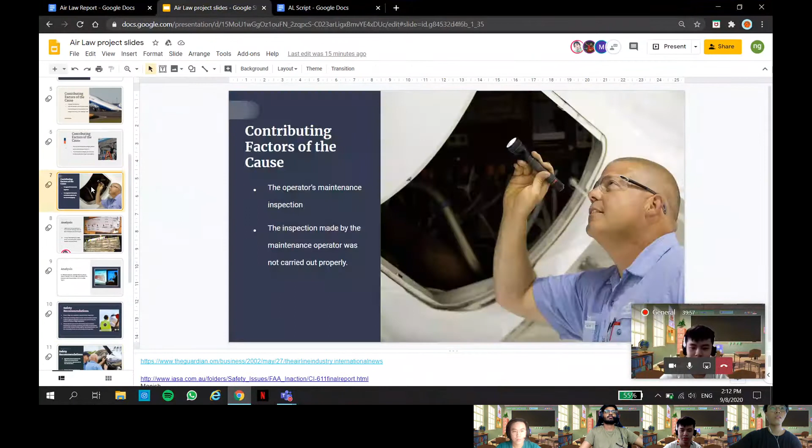Now, I will pass the time to Manish to cover the contributing factors of the cause. Okay, thank you, Jaden. So now I'll be sharing with you all the contributing factors that led to the crash of China Airlines Flight 611.

One of the main contributing factors that led to the crash of China Airlines Flight 611 was improper maintenance after a tail strike incident that occurred much earlier. On February 7, 1980, the aircraft was flying from Stockholm Arlanda Airport to Taoyuan International Airport via King Abdulaziz International Airport and Kai Tak International Airport as China Airlines Flight 009.

While landing in Hong Kong, part of the plane's tail scraped along the runway. The aircraft was later depressurized and ferried back to Taiwan on the same day. A temporary repair was done the day after. Permanent repair was conducted by a team from China Airlines from 23rd May through 26 May 1980. Thus, the tail strike was one of the contributing factors that led to the crash of Flight 611.

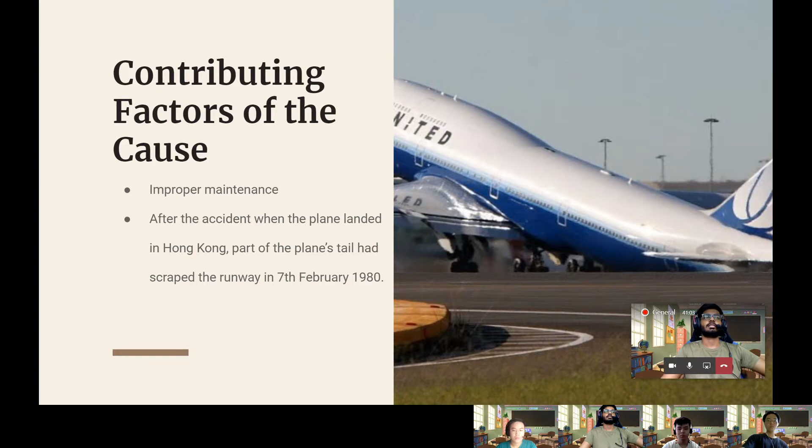Another contributing factor that led to the crash of Flight 611 was the way the maintenance company carried out the maintenance for the aircraft.

After the tail strike incident, the permanent repair was supposed to be carried out in accordance with the Boeing Structural Repair Manual, also known as SRM, by the maintenance company. According to the SRM, repairs can be made either by replacing the entire affected skin or by cutting out the damaged portion and installing a reinforcing doubler plate to restore structural strength.

However, the maintenance company from China Airlines did not follow the SRM. Instead, the China Airlines maintenance team carried out the maintenance even though the damage inflicted on the tail was way beyond what a doubler is meant to fix.

The crash would not have occurred if the doubler was installed properly, as the damaged skin was not trimmed properly and the repair doubler did not extend sufficiently beyond the entire damaged area to restore structural strength. This means that all the scratches would have been completely contained by the innermost row of fasteners, and the fasteners themselves would have been strong enough to stop the propagation of any new and existing fatigue cracks.

However, as the installed doubler was too small, it failed to completely and effectively cover the damaged area where scratches were found, and outside, the outermost row of fasteners were meant to secure the doubler. However, the installed doubler, with scratches outside the rivets, provided no protection against the propagation of any concealed cracks in the area between the perimeter and the row of rivets.

After the number of pressurization and depressurization cycles during flight, cracks began to form around the exposed scratches. After 22 years, on 25th May 2002, after the faulty repair was made upon the damaged tail, the hull of the aircraft broke open mid-flight.

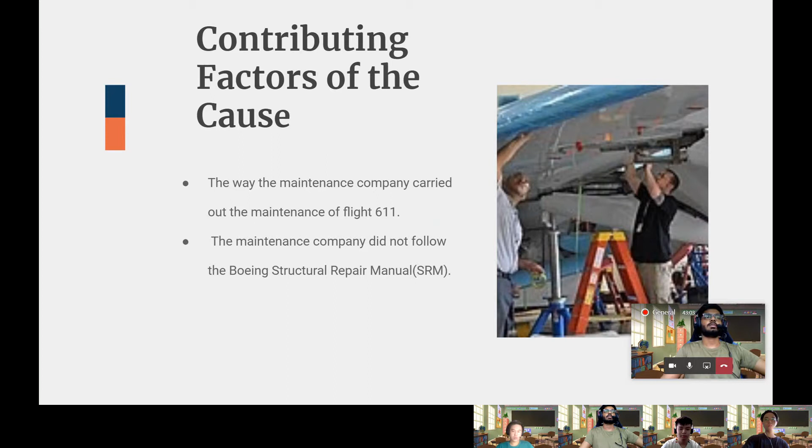Explosive decompression occurred once a crack opened up, causing separation of the aircraft fuselage aft section 46. The remainder of the aircraft section 46 went into abrupt descent, resulting in the separation of all four engines from the wings. This initial breakup point remained connected until the impact with the sea. Thus, this was another contributing factor that led to the crash of China Airlines Flight 611.

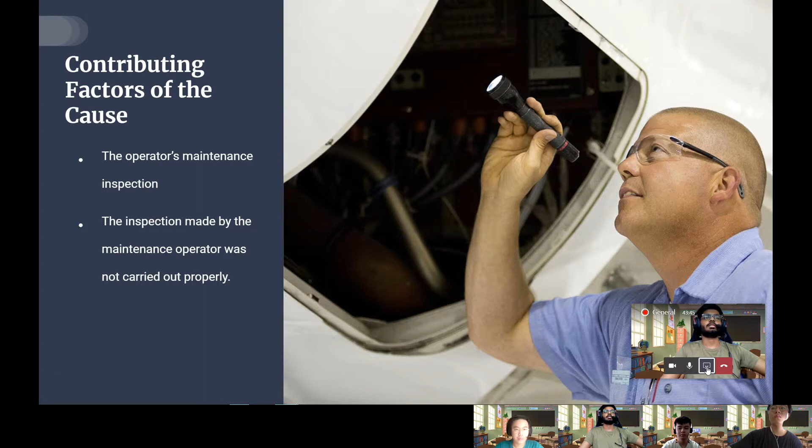Based on the recordings of the cockpit voice recorder (CVR) and the flight data recorder (FDR), radar data, the dado panel open-close positions, the wreckage distribution, and the wreckage examinations, the ASC concluded that the in-flight breakup of the aircraft as it approached its cruising altitude was highly likely due to the structural failure of the aft lower lobe section of the fuselage.

The ASC found evidence of fatigue damage in the lower aft fuselage centered about STA 2100 between stringers S48L and S49L, under the repair doubler near its edge and outside the outer row of securing rivets. Multiple site damage (MSD), including a 15.1-inch through-thickness main fatigue crack and some small fatigue cracks, were confirmed.

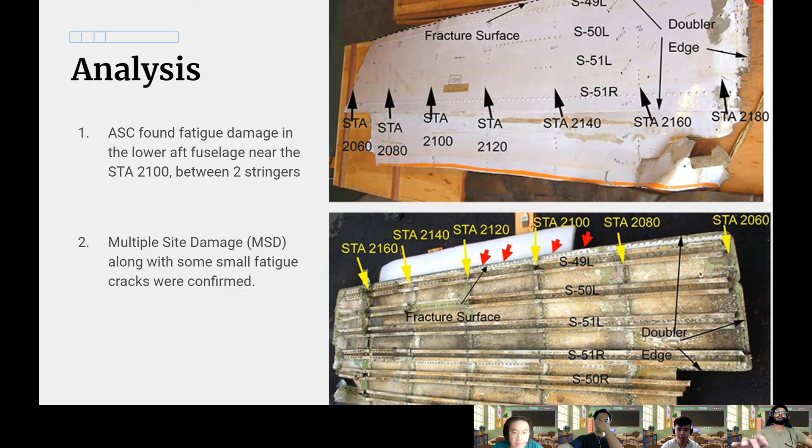Residual strength analysis indicated that the main fatigue crack in combination with the MSD were of sufficient magnitude and distribution to facilitate the local linking of the fatigue cracks, so as to produce a continuous crack within a 2-bay region about 40 inches. Analysis further indicated that during the application of normal operation loads, the residual strength of the fuselage would be compromised with a continuous crack of 58 inches or longer.

Although the ASC could not determine the length of cracking prior to the accident flight, the Council believes that the extent of hoop-wise fretting marks found on the doubler, and the regularly spaced marks and deformed cladding found on the fracture surface, suggested that a continuous crack of 71 inches in length, which is a crack length considered long enough to cause a structural separation in the fuselage, was present before the in-flight breakup of the aircraft.

The ASC found that the 15.1-inch crack and most of the MSD cracks initiated from the scratching damage associated with the 1980 tail strike incident in Hong Kong, for which the repair was not accomplished in accordance with the Boeing SRM, as the damaged skin in that area was not removed but trimmed, and the repair doubler did not extend sufficiently beyond the entire damaged area to restore the structural strength.

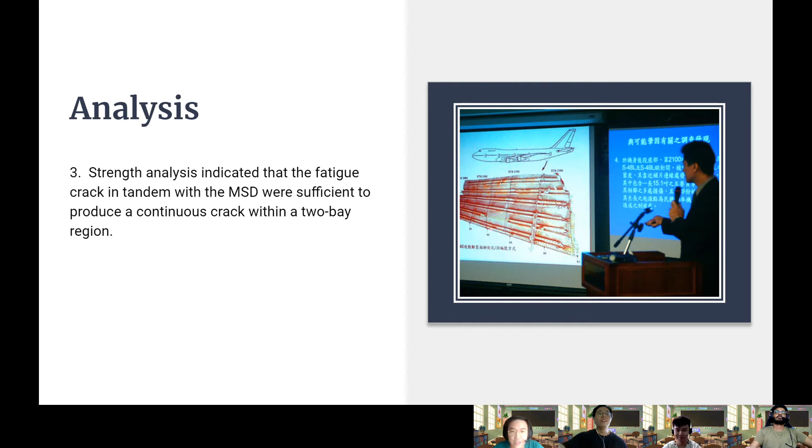Firstly, the CAL did not accurately record some of the early maintenance activities before the accident, and the maintenance records were either incomplete or not found. Before the first structural inspection in the 1998 MDV, the bilge area was not clean. For safety purposes, the bilge area should be cleaned before inspection to ensure a closer examination of the area.

Secondly, ensure that all safety-related service documentation relevant to Republic of China (ROC) registered aircraft is received and assessed by the carriers for safety of flight implications.

Thirdly, ensure that the process for determining implementation thresholds for mandatory continuing airworthiness information, such as the Repair Assessment Program (RAP), includes safety aspects, operational factors, and the uncertainty factors in workmanship and inspection.

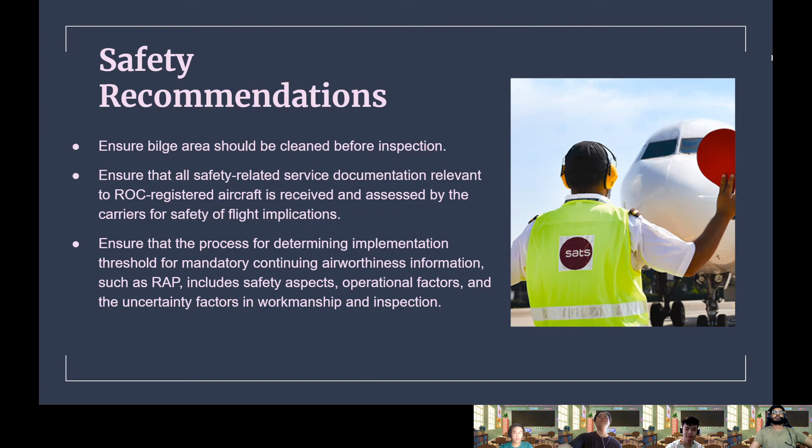Next, we should encourage operators to assess and implement safety-related airworthiness requirements at the earliest practicable time. Furthermore, we should closely monitor international technology development regarding more effective, non-destructive inspection devices and procedures.

The Aviation Safety Council (ASC) also recommends that the Boeing company should reassess the relationship of Boeing's field service representatives with the operators, such that a more proactive and problem-solving consultation effort to the operators can be achieved, especially in the area of maintenance operations, to develop and/or enhance research efforts for more effective non-destructive inspection devices and procedures.

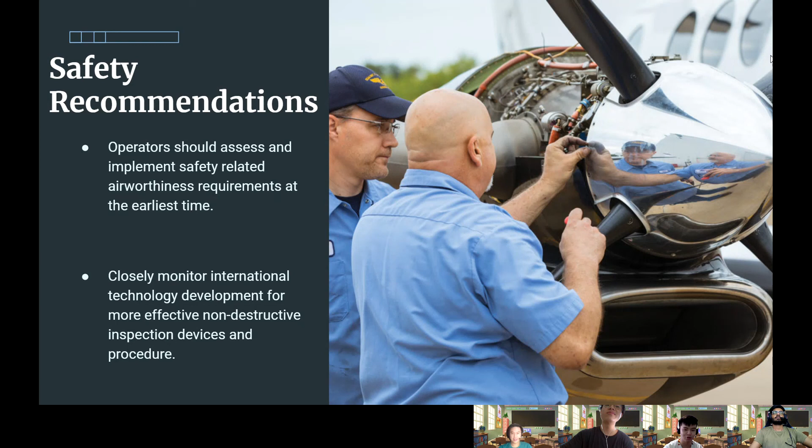All in all, the catastrophe could have been prevented if not for the engineers' lackluster maintenance. The tragic 225 fatalities could have been avoided if proper procedures had been carried out.